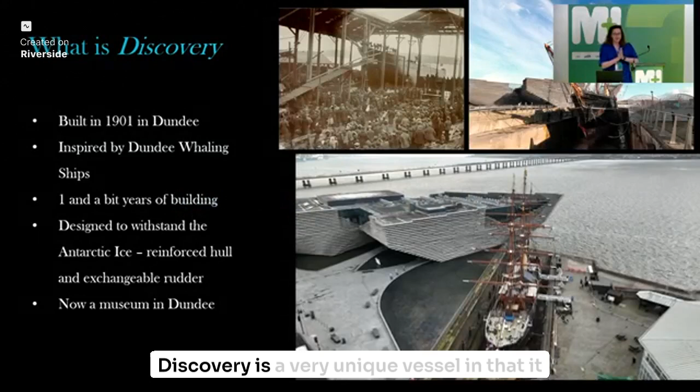So, Act 1, a ship, its city, and the polar voyages. So, what is Discovery? Discovery is a very unique vessel in that it is the last of its kind and also at the same time the first of its kind. It was the last three-masted wooden ship to be built in the UK, but it was also the first ship built specifically for scientific research.

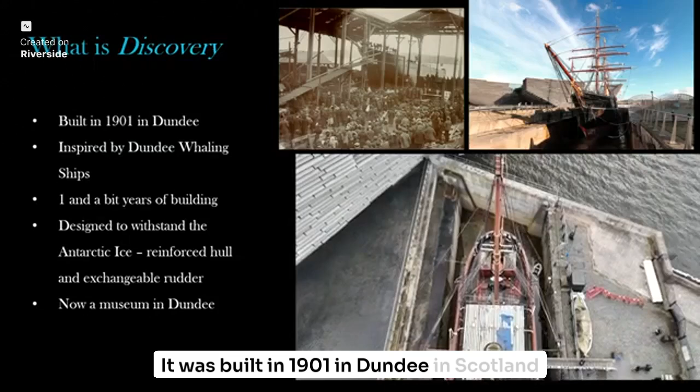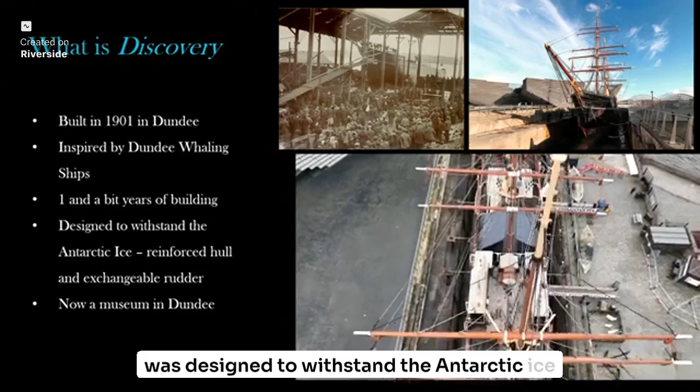It was built in 1901 in Dundee in Scotland and was really inspired by the Dundee whaling ships. It took just over a year to build it, and it was designed to withstand the Antarctic ice crush. And we're now a museum in Dundee, which you can come and visit.

So why Dundee? It was, interestingly, a curious choice almost. So the expedition itself was very much centred in London. It was funded by the Royal Geographical Society, and they decided that it had to be a British ship. Only two tenders came up, one down in Cornwall and one up in Dundee. And because Dundee had that historic Arctic and even Antarctic whaling heritage at that point, Dundee was chosen as the place to build the ship.

It was chosen as well as part of this because it's sort of had this huge heritage of also building clipper ships which were able to take things speedily across. And because Discovery needed to do multiple things, travel across open seas and also go into the ice, it worked really well to be able to use both of those technologies together.

After that, the Royal Geographical Society really wanted to sell it back to the British government as an Antarctic research ship, but the British government went, no thank you, we don't need it, it's too expensive. So they ended up selling it off to a Canadian company, the Hudson's Bay Company, and it just became a regular cargo vessel. That meant that a lot of the original interiors from 1901 were taken out and changed.

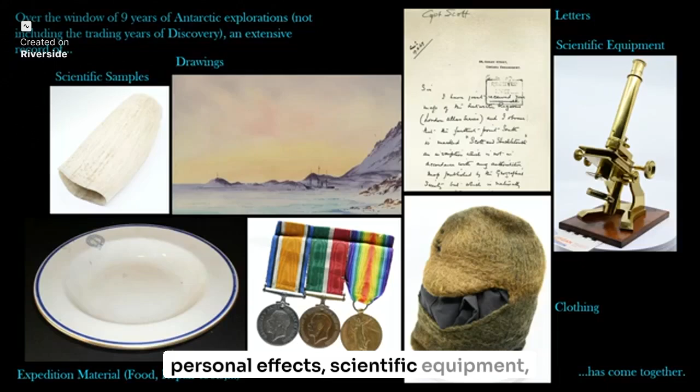So it's a really, really long expedition. And through that, we have collected a whole bunch of different things. So there's scientific samples, there's drawing and artwork, there are letters and personal effects, scientific equipment, clothing, personal objects like medals, expedition material like plates and food and cutlery and all of this stuff.

But it has ended up all over the country. So we'll start at the very bottom, down in Southampton. The National Oceanography Centre has samples from the Discovery expeditions, from the second voyage in the 1920s.

In Cheltenham, the Wilson Art Gallery and Museum - the clue's in the name. It was done in honour of Edward Wilson, who was on the first expedition and tragically died in Antarctica.

A lot of his drawings from the first expedition and his life effects are in that museum. Here in London at the Natural History Museum, a lot of the scientific data from the voyage, specifically from the first and the third. A little bit further north, in Cambridge, you have the Scott Polar Research Institute, which has a lot of personal objects and maps from the crew.

And then in Dundee, we have the actual ship, and all of the little bits and bobs that had been kept with the ship, even after it became used by the Boy Scouts, when it was starting to be used as a museum. So we have some bits, but not a complete collection. Stuff about the Discovery that you might expect to be with the ship is actually dispersed across the whole of the UK and even further afield. We know, for instance, that there is a plate in a museum in Canterbury, New Zealand.

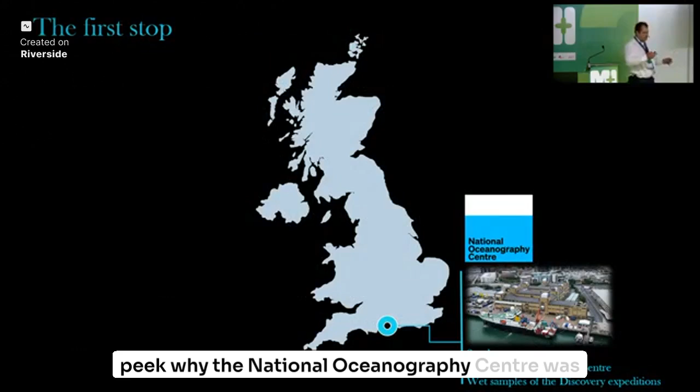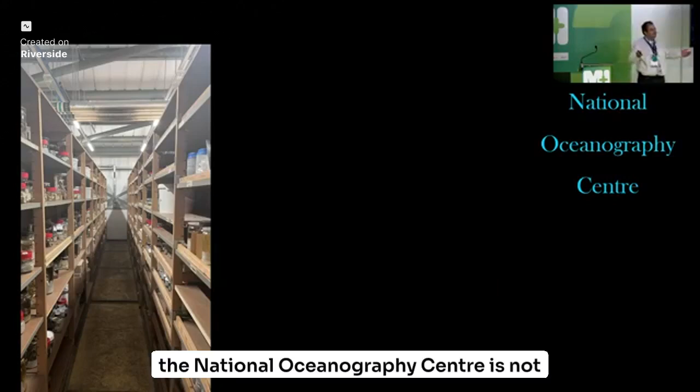Now, the first stop was the National Oceanography Centre. As we had already a sneak peek at why it was important, I'd just prefer to show you why the National Oceanography Centre matters. You might say, okay, the National Oceanography Centre is not really a museum. No, it is not.

However, it is a scientific organization of the UK which looks at everything marine and maritime related. And every time the Discovery we are talking about came back from an expedition, or the new Discovery, they bring something back like that - some really interesting fish in glass jars.

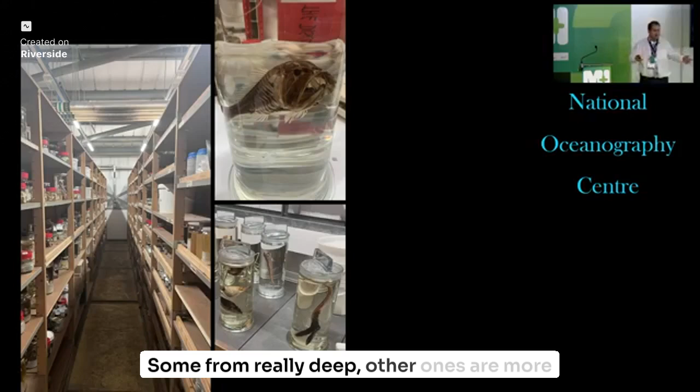For marine biologists, this is of course a treasure just to study. Some specimens are from really deep water, others are more shallow fishes. The discovery brought them back as well, and we decided to record some of these because they were also part of the discovery story.

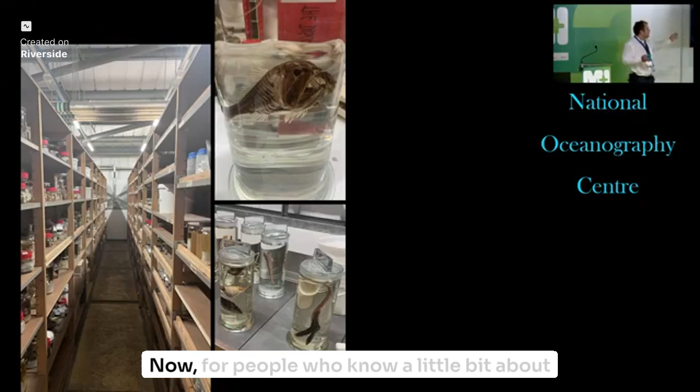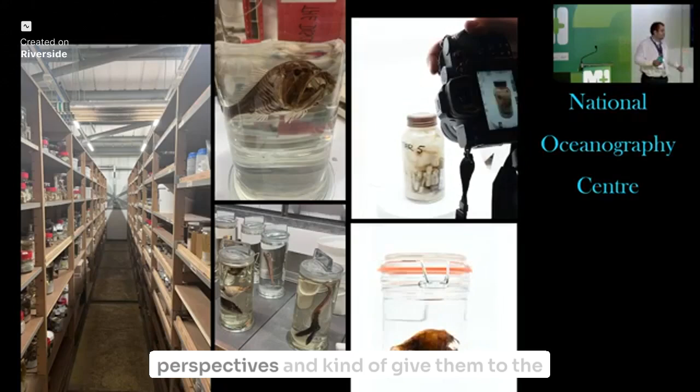For people who know a bit about photogrammetry and 3D modeling, they'd say straight away: glass is an absolute nightmare to model. That's why we used a technology where we collected images of these jars from all directions, uploaded them to a web-based software called WebAR, which now allows us to look at these really cool fish from various perspectives and give them to the public to see what they brought back. Feel free to inspect them on your own time within your own home.

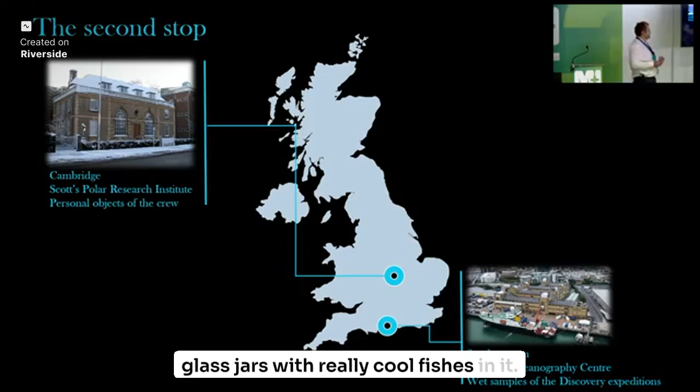The second location was the Scott Polar Research Institute. This one was far easier to collect data from because we didn't have glass jars with cool fish in it. Here, however, we had a lot of personal objects they had with them on board, such as Scott's glasses, as well as plates and many other objects.

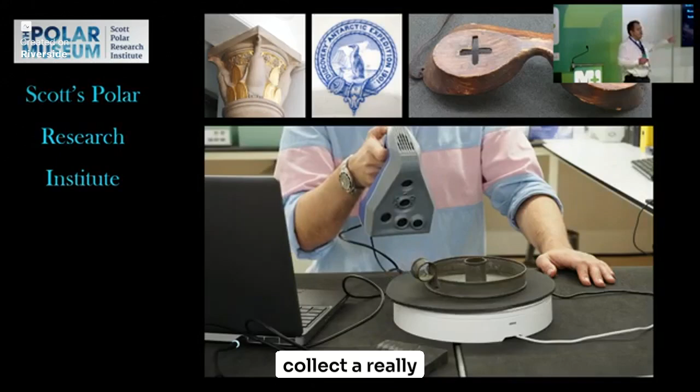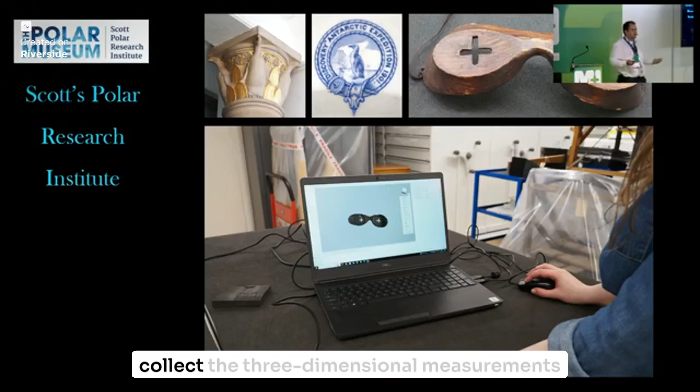Here, thankfully, we had access to a structured light scanner, which allowed us to collect really detailed, high-resolution data of some of the objects. A structured light scanner flashes light onto an object, and the cameras integrated within the system collect three-dimensional measurements from it, allowing you to visualize and create a really accurate 3D model, which you can then slice, analyze, evaluate, preserve, and also give back to the public.

The last stop was Dundee itself, and here comes the tricky part. As you've seen earlier, we wanted to record the ship and some of the objects. The objects, even though really cool, were fairly simple - small glasses like Scott's glasses, a pipe from Captain Robert Falcon Scott, and also his cigarette case.

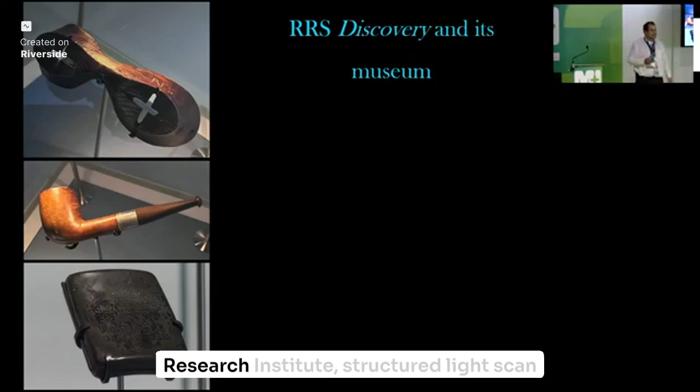Similar to the Scott Polar Research Institute, we structured-light scanned them. We also used photogrammetry, but this was mostly done with structured light scanning, which allowed us to create some really accurate models. But we didn't stop there - we wanted to record every single object, and we also decided the ship itself is an object that tells a story.

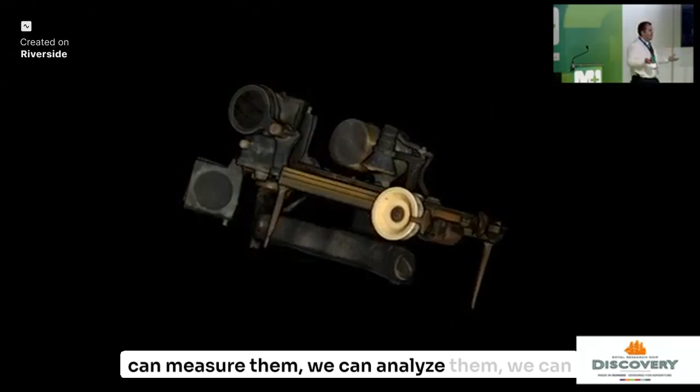This allowed us to create some amazing 3D models, like this sextant, which let us create these models, measure them, analyze them, take them apart, and also disseminate them to the public so people can have access to these objects. Many of these objects are behind glass, and it's sometimes really difficult to get a better understanding of an object if you can't touch it.

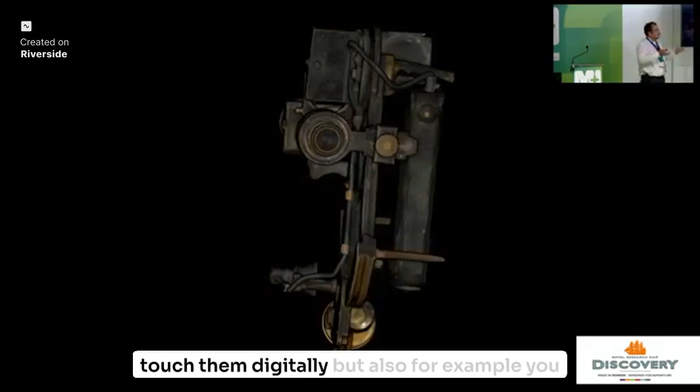With these models, you can not only touch them digitally, but also 3D print them and use them as a handling collection within a museum to really get a better understanding of what you're holding in your hands. In total, we recorded around 65 objects. Here we have just a couple of selections, from knives to plates to some leftover cookies that somebody brushed under the table, but also tennis rackets and many more objects.

Now we can come to the ship itself, and we decided we really want to make a 3D model of this one. It's going to take a while, but we might be able to do it.

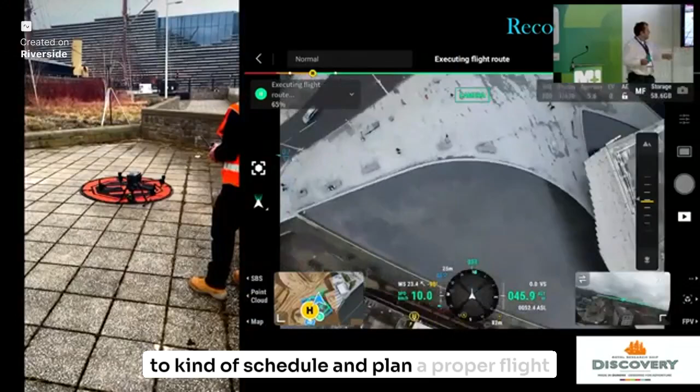The first idea was: how can we record the outside really nicely? Thanks to modern technology and through the University of Southampton, we had access to a commercial UAV drone, which allowed us to schedule and plan a proper flight across the ship and collect systematic data of the vessel, but it also allowed us to carry various payloads. We had two different payloads - one was a camera, which allowed us to do photogrammetry.

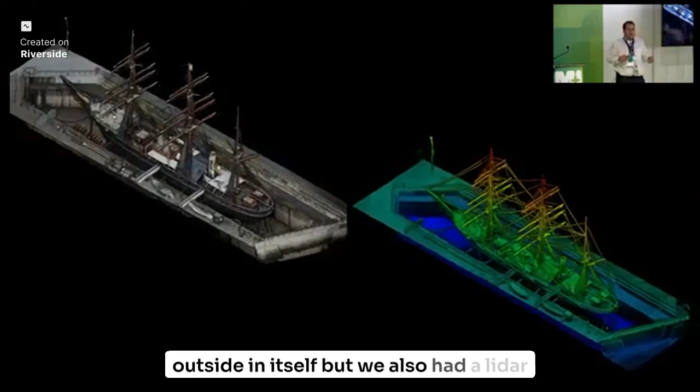This allowed us to collect pictures of the ship from all directions and run it through software to create a really accurate 3D model of the ship's exterior. But we also had a LiDAR payload, which allowed us to create a really detailed record of the rigging itself. While photogrammetry was really good for getting the colors, the LiDAR was amazing at capturing all the rigging of the ship.

Now the second issue was, yes, the outside looks really good. But what do we do with the interior of the vessel?

For this, we used the RTC 360 laser scanner, which allowed us to position the laser scanner in every single room and between various areas, which then allowed us to create a really highly detailed 3D model of the ship itself. I was there with a colleague, and of course now, if you think about a 120-year-old ship, what are you going to find?

You're also going to find some of the darker corners of the vessel. Thankfully, I was not the one climbing in there. I sent my friend in and said, yeah, better. Who knows what they kept under the carpet for 120 years? So please feel free to go.

And I sent my friend into the darker areas to laser scan most of the vessel itself. Overall, we laser scanned pretty much the entire vessel. Of course, there were small areas we weren't really able to access, but in total, I would say 98% of the entire vessel was laser scanned. And without further ado, I'm going to quickly show you the results over the next minute and a half.

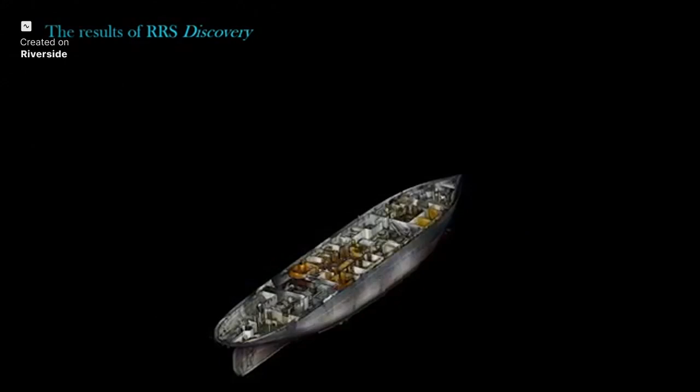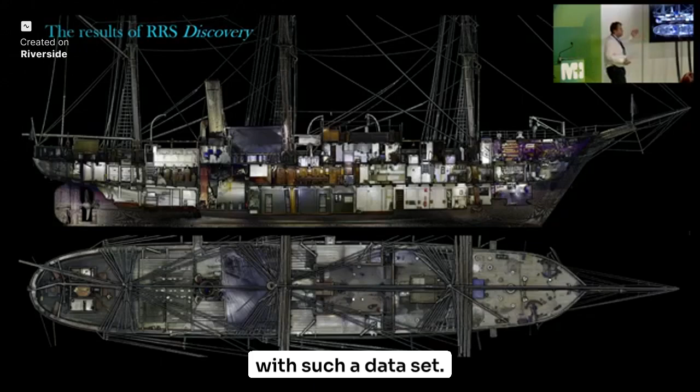So these were some of the results that we were able to collect of RRS Discovery. As you can imagine, this data set is absolutely incredible for many reasons. On one side, we have an accurate record of the ship itself, but we can also start modifying and manipulating the data so that we can get a better understanding of how the ship is designed, and also how it is structured within.

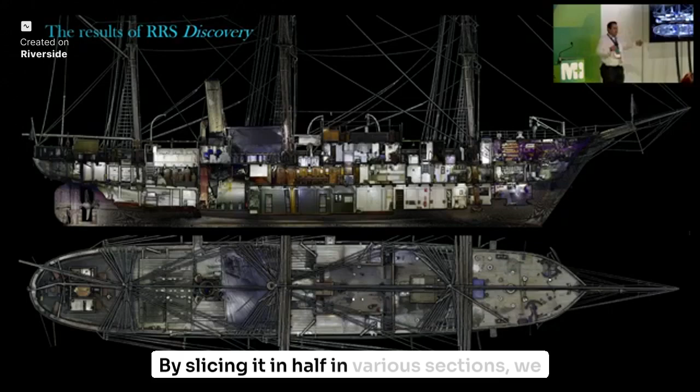By slicing it in half in various sections, we can really get a better understanding of how the rooms are interconnected, how people really lived in these spaces, and so on.

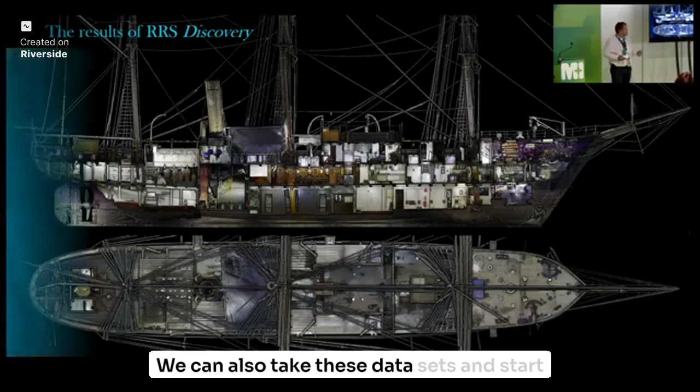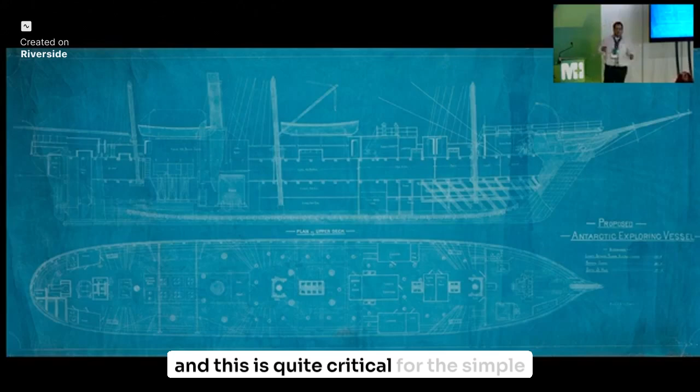We can also take these data sets and start comparing them with the building plans of 1901. Now this is the fascinating part, because of all the changes that Kim nicely mentioned earlier, we now can get a better understanding of what exactly has changed over the last 120 years. This is quite critical, because by understanding what has changed, and how, for example, the timbers have morphed or developed over time, we might even be able to predict what is going to happen in the future and what we need to do to protect this amazing heritage.

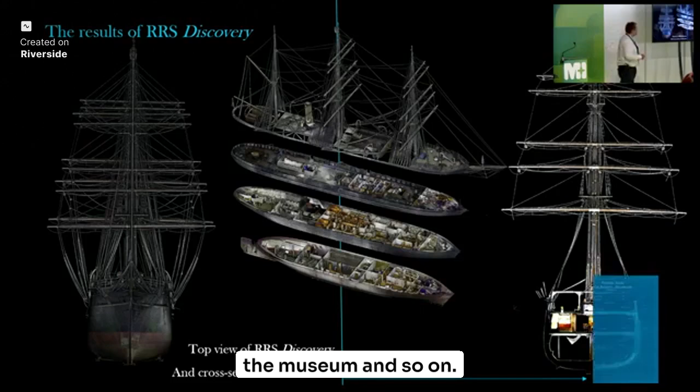Of course, you can also slice it in other directions to create maps for volunteers that can use these to guide tourists around the museum, and so on. Of course, you can also use it for other things, which I'll let Kim take over again.

Some quite scary photographs. So this is the work that we've been currently doing, our urgent works, which were urgent five years ago, but that's heritage for you. So like I mentioned before, the stern is slowly slipping away, and so we figured that what we needed to do was remove some of the weight from the stern of the ship. We took away the obvious things, like the cuddies, the toilets at the back of the ship. We took away the steering wheel, which is now nicely presented in the entranceway. But we kind of felt we needed to go one further as well.

So as you can see here, we lifted up the rudder. Now, this was always designed to happen on the ship, nevertheless it was still pretty scary. So as you can see, we had to get specialist cranes in, lift it up, and pop it back down again.

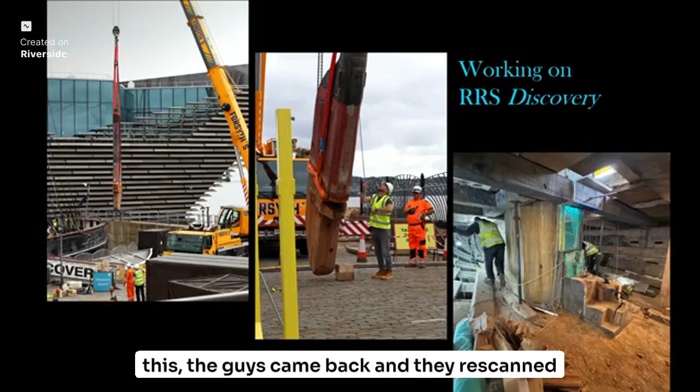This work was done using the scans that we had, because after we'd done this, the team came back and rescanned the ship, and we were able to track how much the stern of the ship had shifted. That allowed us to see that what we were doing was working, especially when you're talking about millimeters on quite a large object.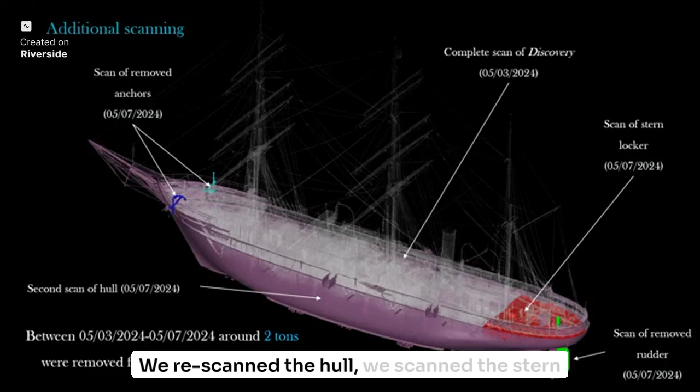Thank you so much. After all these events happened across the Discovery and some parts were removed, we came back in and laser scanned some of the parts that were mostly affected by this change. We rescanned the hull, the stern locker, and the rudder that was removed. By having this data set again, we can start comparing the data and ask: did these interactions that happened on the ship actually have an effect on the vessel itself?

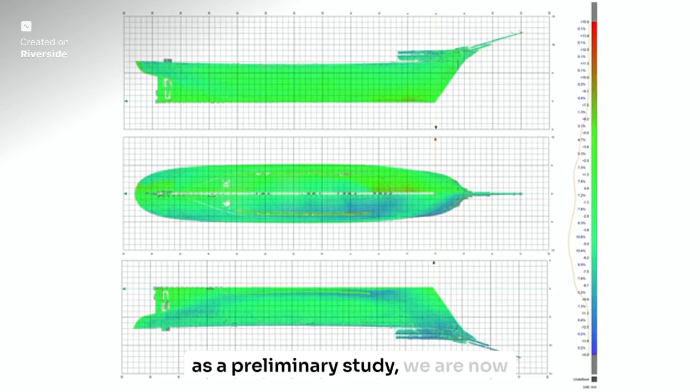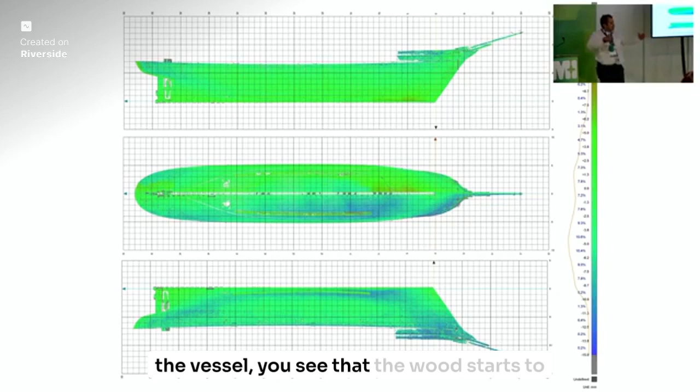As a preliminary study, and we are now in the progress of publishing a paper on this one, yes, indeed it has. There are specific areas where you can see that the ship has slightly warped around 1.5 centimeters in both directions, for the simple reason that with some weight shifted on the vessel, you see that the wood starts to slightly shift across the entire hull itself.

And with that data set now in mind, on one side we were able to compare it, but we're also able to give it back to the public. Every time we created a 3D model of these objects, we also created an entry in a Wikidata storage entry, which allowed us to create this really big network of different objects, people, and time periods, which people can then analyze if they want to.

Now, imagine we have Scott's glasses. We really want to connect it within the Wikidata storage to something that already exists, such as Robert Falcon Scott. He already exists as a Wikidata entry. We can then attribute Scott's snow glasses to the room itself, and then start attributing those to a period, to an expedition, in this case the Discovery expedition from 1901 to 1903-04. We can also start interconnecting some of the wet specimen samples as well as other instruments, objects and people that we have collected.

If we bring that further out, what we can create is a massive network of objects, people, rooms, time periods and so on, which we can now analyze and say, okay, we have this structured data repository, where people are interconnected, where objects are interconnected, how do they fit together? Hopefully this data network will give us a better understanding of what went through the minds of these people, how they are interrelated, but also tell a better story of the ship itself.

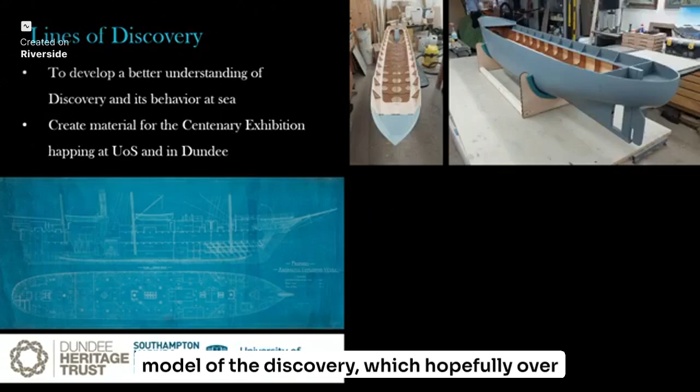And now to conclude, I'm just going to quickly show what's going to happen next with this project. We also asked for a little bit of money to do the Lines of Discovery project. So now we have a 3D model, we have the lines of the ship. What can we do? We created a 2.5 meter small wooden model of the Discovery, which hopefully over the next couple of months will be tested at the Southampton towing tank.

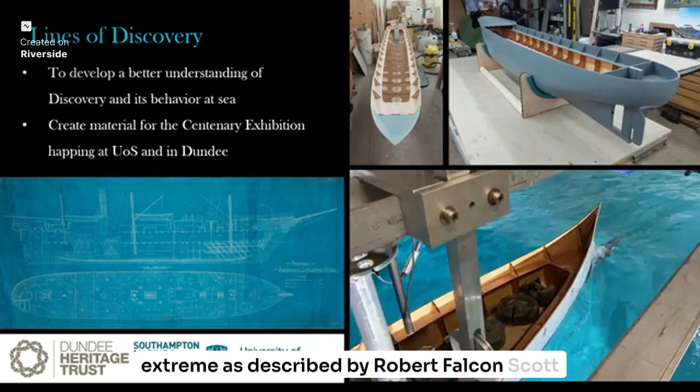This hopefully gives us enough information on how the ship behaved at sea. We have some really interesting comments from Robert Falcon Scott that weren't really positive about how well the ship actually performed within the sea, but thankfully now we have the technology available to test exactly that, to see was it as extreme as described by Robert Falcon Scott, and what are some of the extreme limits that the Discovery, this amazing ship, was able to hold. We're quite looking forward to it, and hopefully we will be able to share more information about this quite soon.

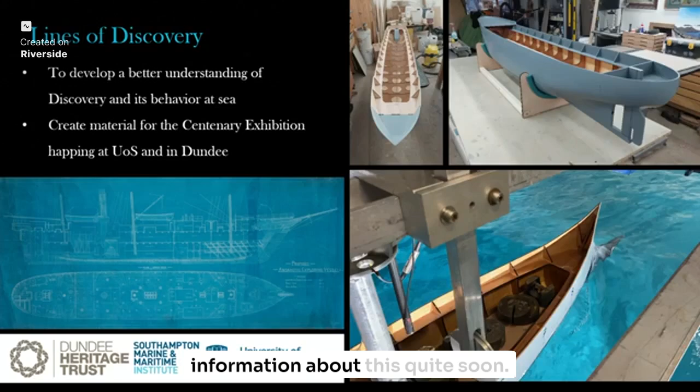And back to Kim. From our side, we are about to embark on a massive capital project as well, so we're really excited as to how we can integrate these 3D scans into making our site more accessible, if we can use 3D modeling to allow people who can't get on a ship that was not designed, annoyingly, for people with access needs — they just didn't think about it back then. So we're using these things to bring more access to the site as well, including things like 3D printing Scott's goggles so that you can actually physically see what that's like.

So the outcomes of the project for us have been both technical, in terms of caring for our collection and our ship, but also in terms of access and being able to imagine something that is really quite distant for most people. But yeah, we're more than happy to take any questions that you have. Thank you so much for listening.